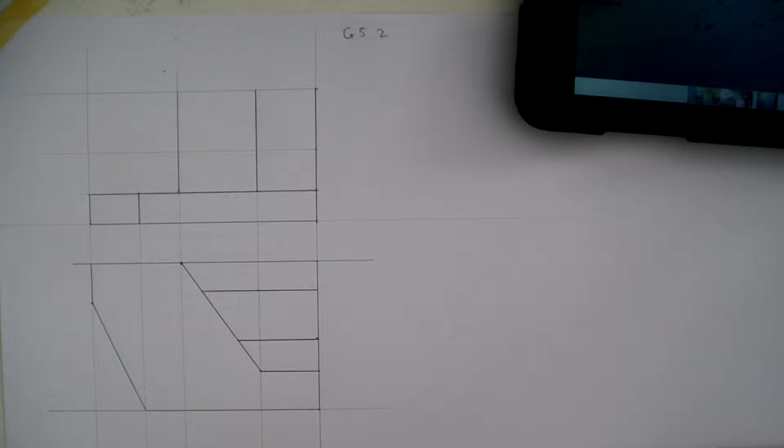Okay, so what I want to draw now is the end elevation. The end elevation is looking in from this point here, okay? So what's the first thing I'm going to do? Hands up.

Raj? So Raj says I'm going to draw a line across here at 45 degrees. Okay, so at 45 degrees I'm going to draw a line up here. So what am I going to do once I've drawn that line at 45 degrees? Raj? So I'm going to take all these lines across.

So every point that I can take across, I'm going to take it across. Now I've brought it up to the 45. I'm now going to bring it straight across. So let's go here, and I'm going to bring it straight up. Nice and light now, nice and light lines.

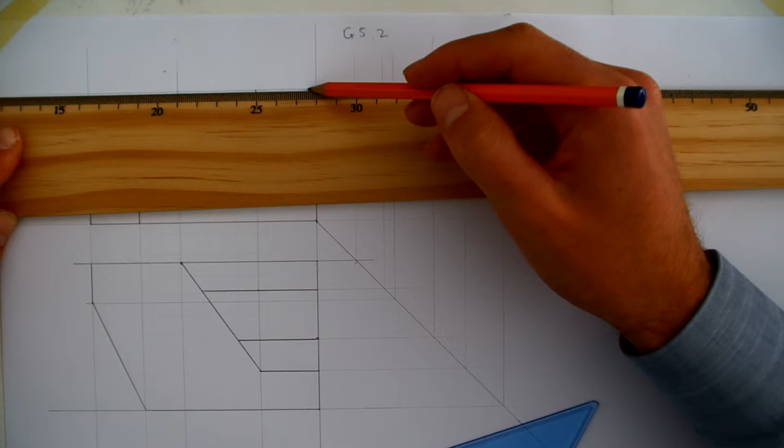Okay, so yeah, straight up, yeah. So as soon as it touches the 45, you go straight up. Good question, Charles. So we've got this now.

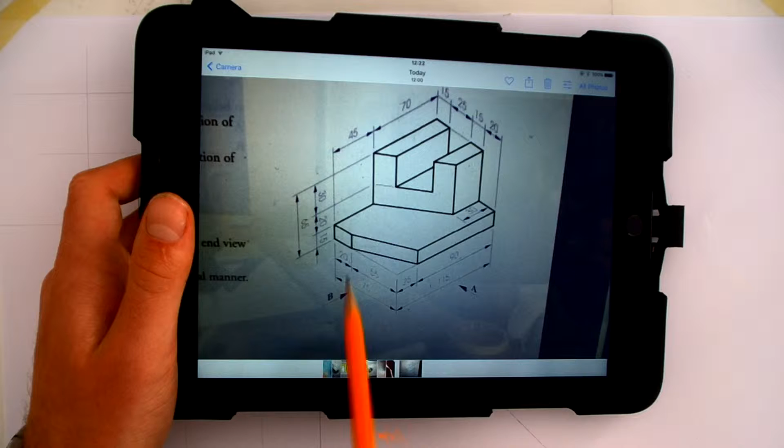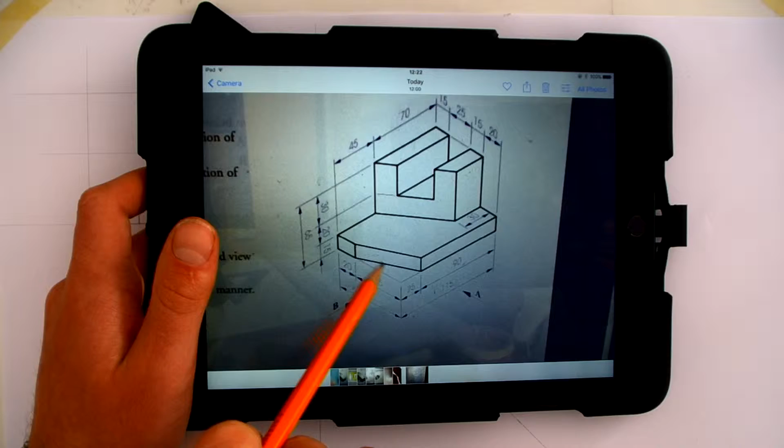So I'm looking in here from B. The first thing I'm going to draw is this kind of platform here. Okay, so I can see that's 20 in. So I'm going to mark that in now. Okay, so this is my starting point. So I've brought that over from here. So I'm going to mark 20 millimeters in. I've already marked it, so that's the point there.

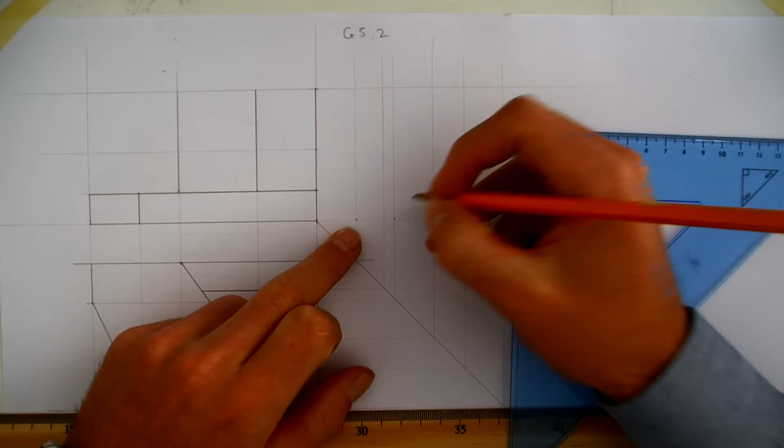So I'm going to take my line across from here. So that's the height of the platform. Right, and now I can draw this line in heavy. I can draw this line in heavy. And I can draw this line in heavy. So I've already got the platform in the end elevation, haven't I?

Okay, so I want to draw this outcrop here, okay, this piece that juts out at the top. So what I'm going to do is I'm going to follow the lines up. So I can see that it starts here. So if I'm looking in this direction, okay, I'm looking in from here, I can see this corner. I'm going to follow it up, and that goes up right up to the top, okay.

So let's draw that in. Right, so I've drawn that in. And now I want to draw this side here. So I want to see what I'm going to see. I'm going to look along this line here, and I'm going to follow it, and it comes up to here. So let's mark that straight up to the top again. Okay.

So I've now found these two lines, 1 and 2. What I want to find now is I want to find these two. So I'm going to draw them in lightly this time. So I'm going to follow this one up and see where it is there. Okay, so I'm going to draw that in a little bit heavier, so I have that there. That's the first one. Second one is here, so I'm going to draw that in a little bit heavier.

Now we need the height, okay? So if I look at my drawing here, I can see this measurement. I want to mark how far is it down. Someone tell me. No one tell me, no? How far is that? 30, yeah, exactly.

So mark down 30 and draw a line straight across. Ah, no, I've gone that line a little bit too long. Leave that back a little bit. Okay, so.

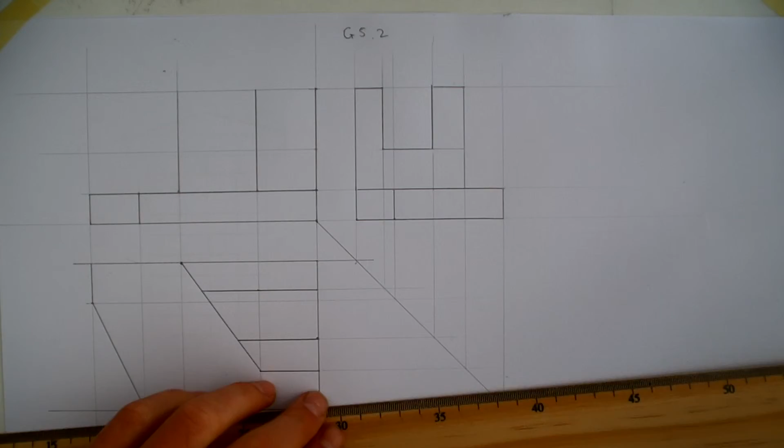Okay, so we've got this drawn in. So we've now completed the end elevation. So it's nice and simple.

Easy. Okay, so now, do you remember we weren't able in the elevation, right? We weren't able to draw this in because we didn't have the measurements. Okay, so now what we can do is we can bring the points up from the elevation.

Okay, we've got them drawn across. Okay, so we've got them drawn there, and we just need 2 lines heavy at the top here. 1, 2. So now we have that complete.